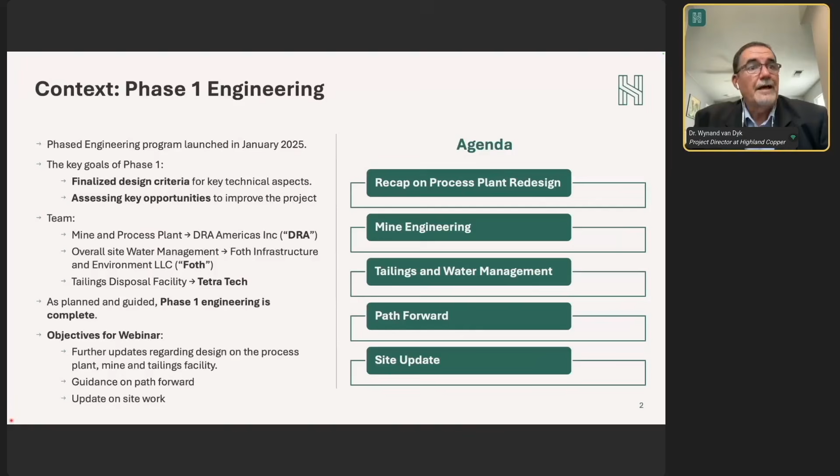So what are we going to talk to you about today? The objective of this webinar is to briefly recap the process plant, talk about some of the work done on the mine engineering and the tailings dam, give you some guidance on the pathway forward, and then use the opportunity to give the listeners an update on where we are from a site perspective and the work that's been done there.

So let's talk about the process plant. First of all, good news is we've done the webinar, I think it was about 6 weeks ago. We got really technical about the process plant, so we're not going to go into that level of technical detail today. But I do want to touch on the work that was done for those that missed it and try and summarize all of that.

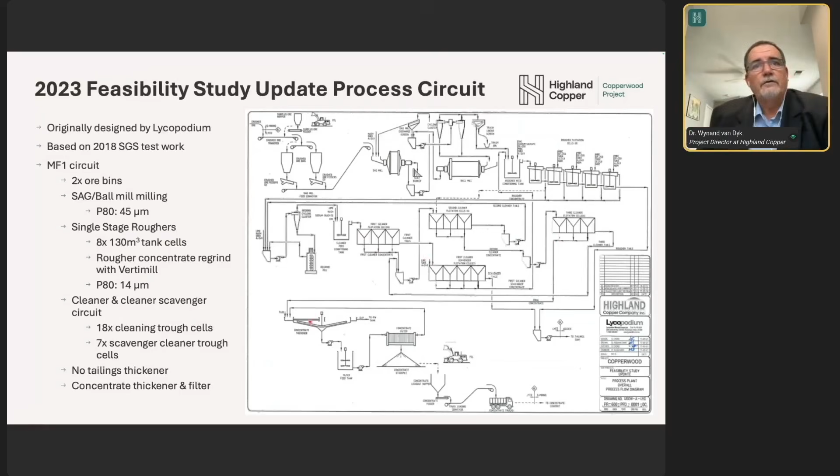Recapping what we had in 2023 in the feasibility study. This circuit was based on test work done by SGS: a single milling circuit, SAG mill and ball mill, milling down to about 45 microns. 8 conventional roughers whose concentrate fed a regrind mill. From that regrind mill, we had quite a complex cleaning circuit. There were 25 conventional trough cells in various configurations. All of that conc went into a concentrate thickener and filter, and there was no tailings thickener in this process.

What we have today is a much simpler circuit. We've replaced those double feed bins with a single silo, 50% additional capacity. The idea behind that is we just reduce operational risk. We've split the milling circuit now into what's called the MF2 circuit. So we've still got a SAG mill and ball mill right up front, but those are smaller. We are milling down to 80 microns on the front end rather than 45 microns. Primary rougher and a scalper circuit. We then de-slime and have got a secondary mill.

Now, from a flow perspective, about 25% of your material goes into this rougher conc circuit. About 25% of the material goes over from a de-sliming perspective. That means only about 50% of the material sees the secondary mill, so we can mill down to 38 micron. So we've got smaller mills up front, a smaller secondary mill, and a regrind mill going down to about 10 micron. We've replaced all of those complex float circuits with Jameson float cells, so there's 6 of them, which reduces the entire footprint of the plant dramatically.

We've decided on using a tailings thickener, and what that gives us is that we can, in essence, recycle our water immediately back into the plant, and the thickened tails go to the tailings dam facility.

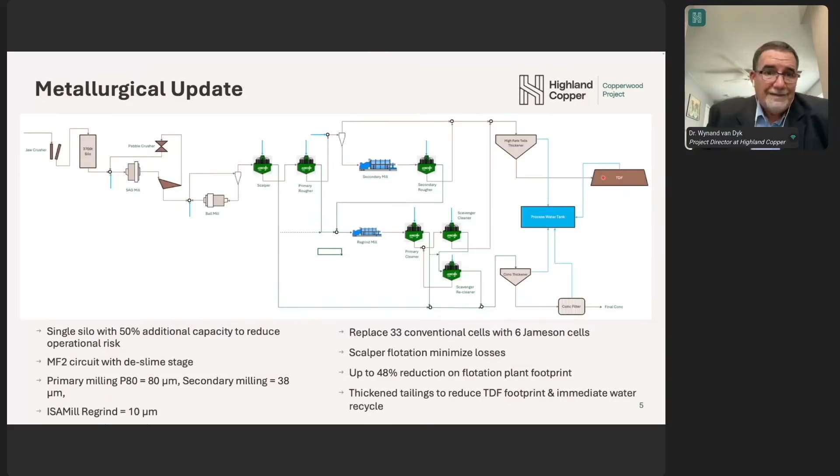What all of this gives us at the end of the day is certainly higher recoveries and a lower cost. Previously, the baseline for the project was 86% recovery. We're now up to almost 88. We optimized the reagent scheme. That saves about $1 a ton on OPEX.

There's also further OPEX savings in that it's about 1.5 megawatts of power that we will not install, and we won't draw that power. And that gives you some additional power savings there. We've got a much smaller and certainly a much smarter flotation plant. The good news is we've reduced and cut out a lot of the complexity.

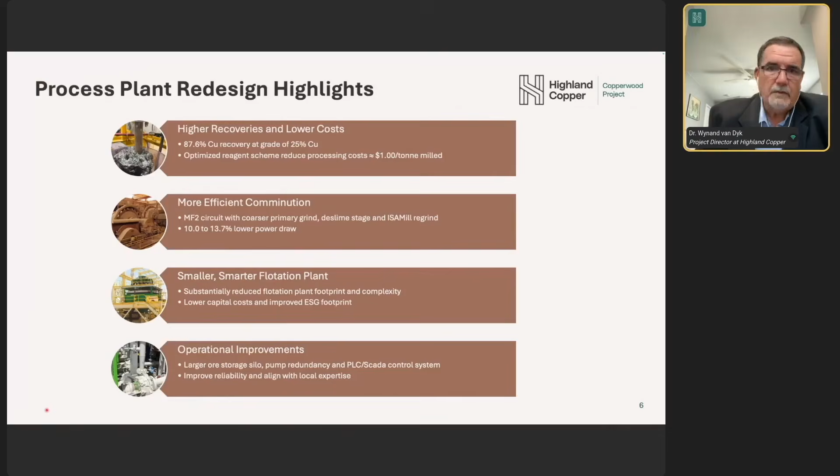And then lastly, the other operational improvements like the silo, pump redundancy, having a PLC SCADA control system, all of that will just improve the reliability and align with what we've got currently in the area to work with. Pretty happy from a metallurgical perspective. I think we are ready to step into the detailed design from that perspective.

Let's talk about the mine engineering side. Now, on the mine engineering side, DRA looked at several optimization efforts for us. And the first one was trading off room and pillar versus drift and fill from a mining perspective. The 2023 feasibility study had room and pillar mining in. It's the current base case.

It is a proven method, certainly nothing wrong with it. It was used historically at White Pine, so we do think it's a valid mining method for the ore body. And this is a very simplified graphic of what it looks like. So you mine these drifts in a square pattern that creates these rooms, and there's some pillars that you leave behind.

The drawback of room and pillar mining, especially if you're not robbing the pillars, is that your overall mine recovery is, call it high 60s, maybe touching 70%. So DRA therefore evaluated drift and fill mining for us. Now, in drift and fill, we're mining these much longer drifts.

Once you've finished mining a drift, you come back and you pump it full of paste, and that paste is made out of your tails with, call it, cementitious binder. Once that is settled and you have the structural strength of the paste, you can then come back and mine the area between these paste-filled areas, which is solid. So your paste becomes the roof support. Again, an oversimplified version of what happens.

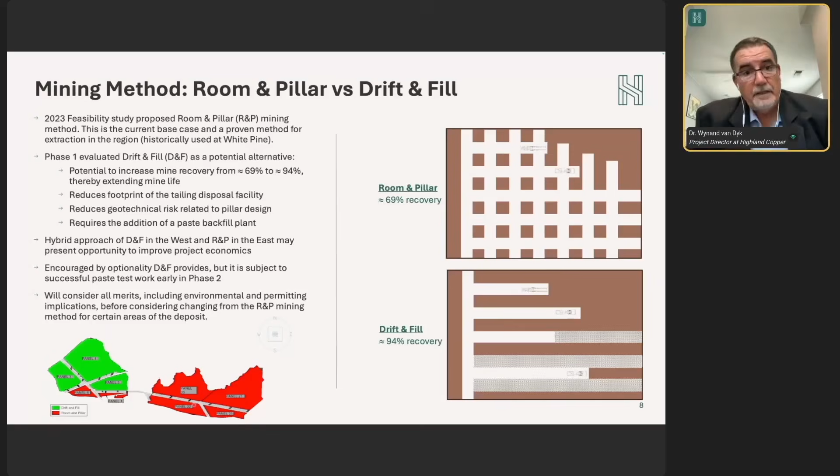So that's something that we'll do very early now in phase 2, do some paste test work, and make sure that we can actually keep the roof up using that paste. And then once we have those results, we'll consider all of the merits, including environmental and permitting, before we actually make the decision to make this change.

Another piece of work that DRA did for us is they reviewed the excavation method or the mining equipment. The 2023 feasibility study used roadheaders where the mine height was above 3 meters, and conventional drill and blast using 2-boom jumbos with mining height below 3 meters. And the 3-meter number is purely because of the size of this piece of equipment.

So what they reviewed is productivity assumptions associated with these road headers. And keep in mind, these are big machines. They're not overly maneuverable. How do you sequence that with the roof bolters coming in, and the overall impact on the cycle time?

And where we are today, we'll continue to assess the technical and financial merits of using these road headers. Frankly, we'll look at the optionality of a phased introduction rather than going the whole hog right up front. And the whole idea behind this is just managing risk. What you don't want is having a plant that's commissioned, ready to run, but you cannot feed the plant. So that's certainly the optionality that we are looking at this point in time.

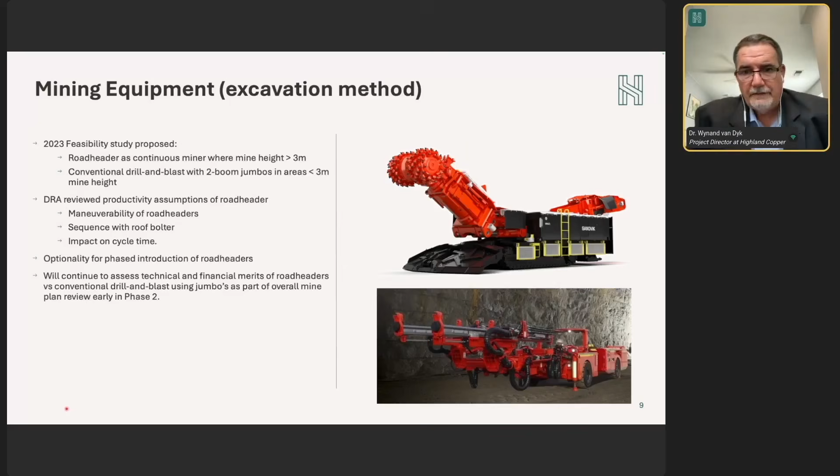From a tailings and water management perspective, the 2023 feasibility study, as we mentioned previously, just pumped unthickened tailings to the tailings dam or the tailings disposal facility. What we are doing now is we're looking at putting in a tail thickener. So your percent solids goes up to around about 50%. And immediately that reduces the size of the footprint.

The other advantage is it allows us to recycle our water immediately back into the process plant. And you're not pumping the water all the way to a tailings dam where it can evaporate and then try and recover it from the tailings dam and back to the plant. So that cuts some water handling cost. And certainly because we're no longer using the tailings dam to store the contact water, that reduces instability risks substantially.

But we've updated the water balance. We ran various climatic scenarios from extreme wet to extreme dry to make sure that we have enough space and we can actually keep the plant fed from a water perspective, and then we can manage the risk. So as part of phase 2, once we understand the volume of the tailings, then we can look at optimizing the embankment designs. And obviously from a closure perspective, if you've got a smaller tailings footprint, optimize how we close the facility down.

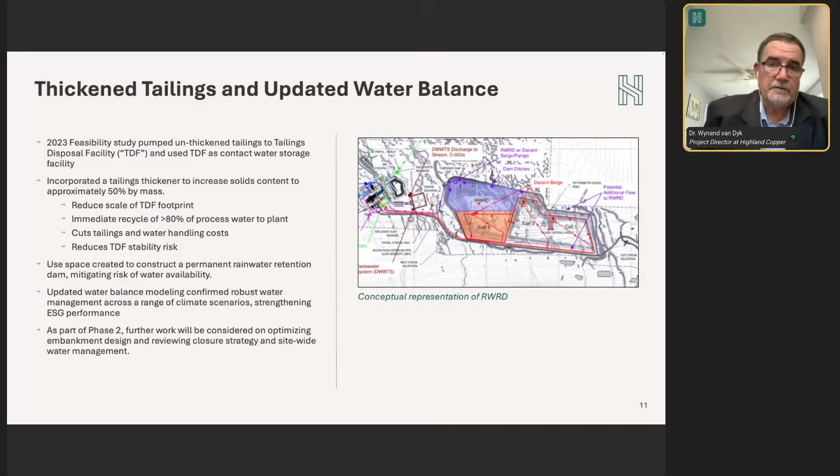One last piece of work that DRA looked at for us is the option of just using the underground void as a storage facility for some of our tailings. Now, this is slightly different from the paste backfill. It's still a paste thickened, but we don't have a binder. So in this case, we'll construct these, call it brattice walls in the mined out areas, and then just take that paste and actually just pump it into the void.

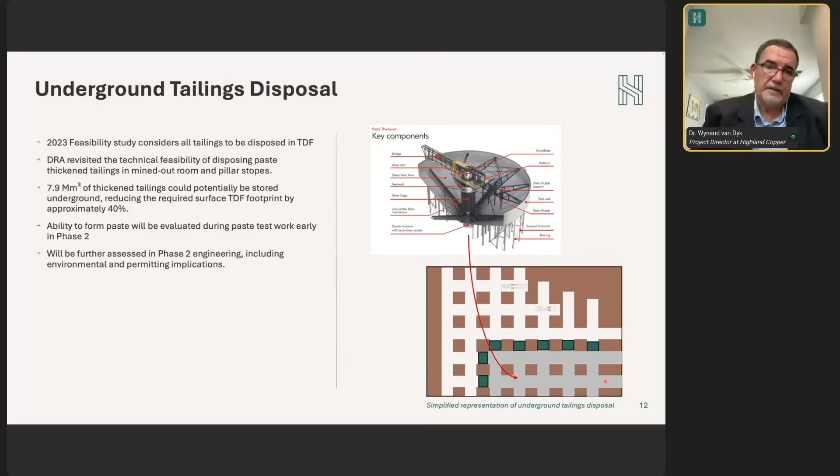The study indicates that we can store almost 8 million cubic meters of thickened tailings underground. That reduces your tailings TDF footprint by about 40%, and that's real value for us. Again, this has to determine the ability: can we form a paste, and is that a reliable way of operating the plant? And that we'll test now early in phase 2. And once we have clarity on that, we'll assess that in the phase 2 engineering.

So talking about phase 2 engineering and the pathway forward, just to give you a brief glimpse of the current thinking and where we are. As mentioned, metallurgically, we're pretty happy with what we have from a design criteria perspective. But while we wanted to be in the same place on the mining method, certainly the work that's done to date suggests that we need a little bit more work. There's 2 key inputs. First of all is this paste test work that I've previously referred to. And that's going to take us about 3 months to do.

And the only reason why we're starting now is the metallurgical test work is pretty much wrapping up. So we've actually got the actual process tailings and the water that we can use to do this paste test work. And the second piece is labor cost. Just do an update on our labor cost. While we're waiting, we want to use the opportunity to actually do a review of the entire mine plan, starting with ground support, mining height, mining equipment. Clearly, if you're doing mechanical cutting of the ore versus drill and blast, you have less shock on the roof and ground support.

So use this time that we have while we're waiting for the results of the paste test work to actually do an integrated review of the entire mine plan. And then depending on the final design criteria, then we have to make the call on what about permits and permit amendments. So if we need to do permit amendments, then obviously we will have to adjust the schedule accordingly.

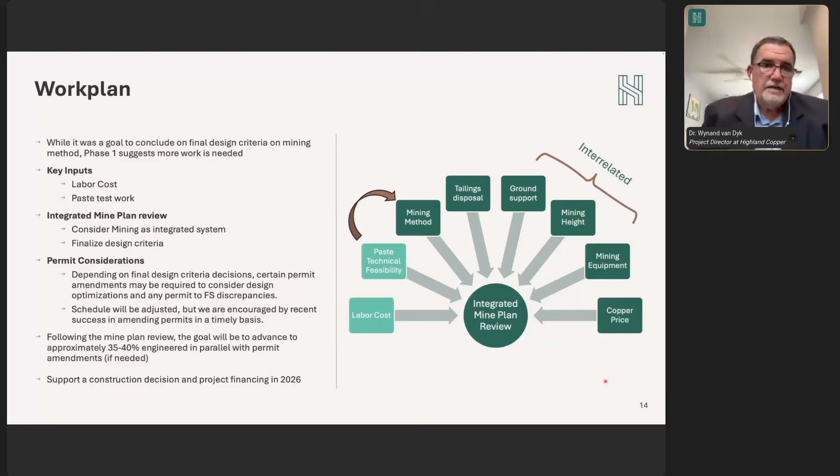Lastly, let's talk briefly about the site update. Great pleasure to report that all the construction work is done. Our site team keeps on delivering. So all of the construction work that we had to do is behind us, done on schedule, on budget. We're busy with the paperwork, literally on as-built drawings. The concurrent reclamation work has also done a huge amount of effort there. We finished all our seeding and tree planting work, and we're actually now in survival warranty analysis.

And these 2 photographs just at the top just show you what's happened to the site. This is what it looked like in May on the Gipsy wetlands that we built. That same wetland in August. The plant growth has now started, and this is exactly what we want to see. Pretty happy with that.

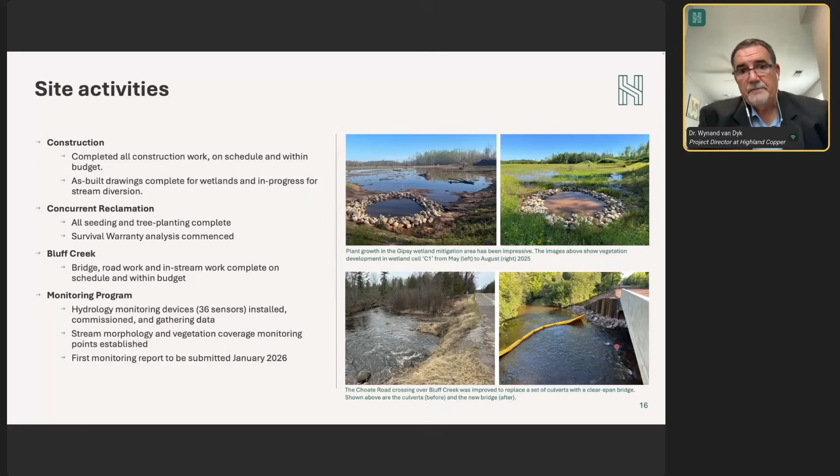Lastly, in terms of Bluff Creek, that's the work that we were doing offsite, where we replaced these undersized culverts with a clear span bridge. That work is also done, all the in-stream work is done, and we're busy with the as-built drawings on that. So we're now moving from site work into the monitoring program, and pretty happy with where that stands. So thank you for the time, and happy to take some questions as well.

Awesome. Appreciate it. I do have a couple questions that I was hoping to run through. As you said, we did that detailed webinar on the metallurgical circuit about 6 weeks ago. And I know that you mentioned you're doing that variability test work. I'm curious, beyond what you've shared already, is there anything you can talk about on the results of that test work today? Yeah, good question.

We didn't talk about it just from a timing perspective. Happy to say that most of the variability test work is now done, and the results certainly look good. Gave us the same level of performance as what we had. We've even run lock cycle tests on that variability test work, and we fall on the same grade recovery curve. So that gives us a lot of confidence on the metallurgical design, and that's why we're saying we're comfortable stepping into detailed design once we get the go ahead. But let's finish the work on the mining side before we step into the detailed design on the metallurgy side.

Okay, makes sense. I know the potential shift from room and pillar to that hybrid approach that incorporates drift and fill mining could increase recovery from, I think, 69% to 94%. So that's a really substantial difference. I know earlier studies must have looked at drift and fill. So what's changed now that you're viewing it as truly optional for the project? Yeah, you're quite right. Earlier studies did look at drift and fill. What's changed, frankly? Copper price.

If you want to go drift and fill, it means you need a paste backfill plant, which is going to introduce additional capex. You also need sometimes a substantial amount of binder and or some form of aggregate or slag that you use to give you additional structural strength, and all of that introduces additional OPEX. So you've got to be in a position where the additional revenue that you get can certainly pay for the capex and the OPEX.